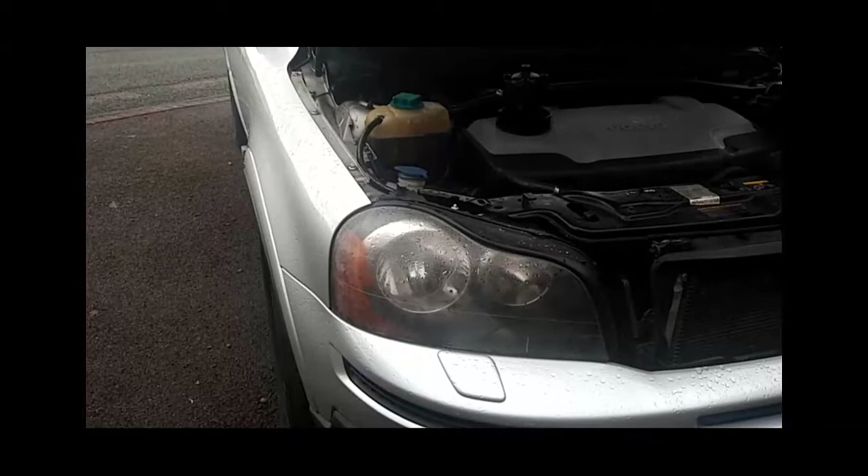Today I'm going to show you how to repair the power steering pump in a 2007 Volvo XC90. This is a UK model, so it's driving on the right hand side, with a D5 2.4 diesel engine.

So basically the problem was the power steering was stiff when stationary. When the car is stopped, you start the engine and try to turn, it's very stiff, pretty stiff, you can't actually turn it. You would need full hand power.

So I took it to the garage, not the Volvo dealer, the local garage. They said I need to replace the pump. I was curious and wanted to find out what could actually go wrong with the pump. I couldn't see any oil leak or anything like that. Power steering fluid was full to the limit it was supposed to be. Had no issues, but still no power steering.

So when you're driving, when the car is moving, it's all fine. But when you're parked, when you want to reverse and all, it's absolutely a nightmare.

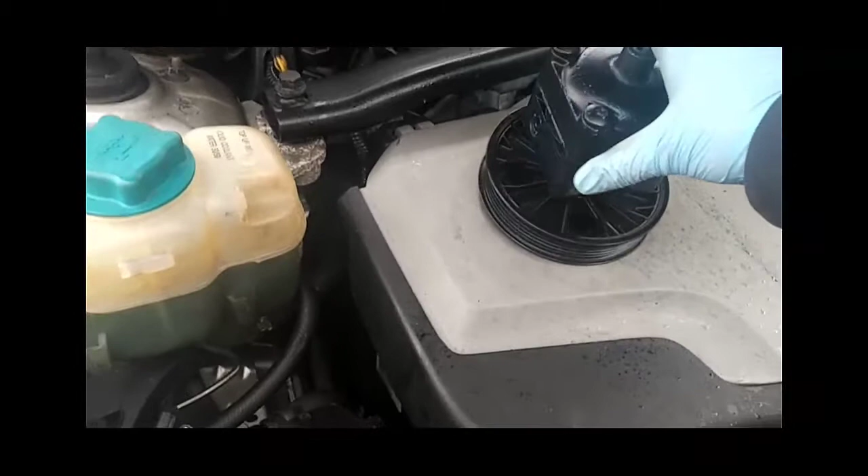So I've taken the pump out here. This is the pump, sorry I couldn't find any part number or OEM number for me to give you. I haven't made a video showing how to remove the pump, what to remove and how to put it back, because there are plenty of videos on YouTube you can find. I thought I'd save my time and your time, just showing what the exact problem was.

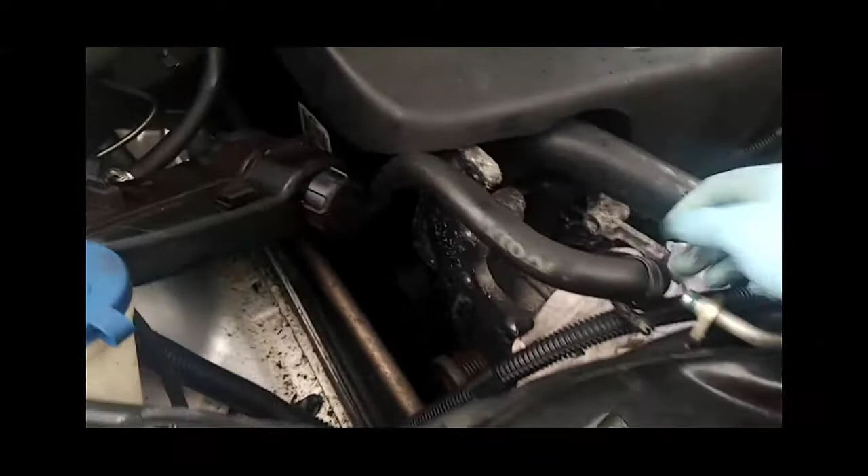So my problem is very stiff power steering when it's stationary. As you can see, I've just emptied the oil, then removed the casing, then removed the drive belt, removed the hoses, the pipe, and took this one out.

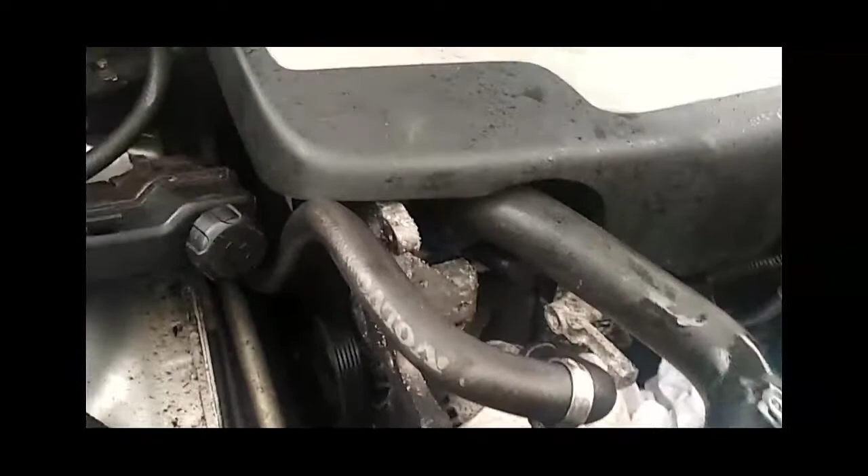From there it had bolts - 1, 2, 3, and then the one at the back here, so 4 bolts, 10mm. You have to undo those and take the thing out.

So I've taken it out, and I'm going to show you in the next video what the exact problem was, how I fixed it, and how to do that.

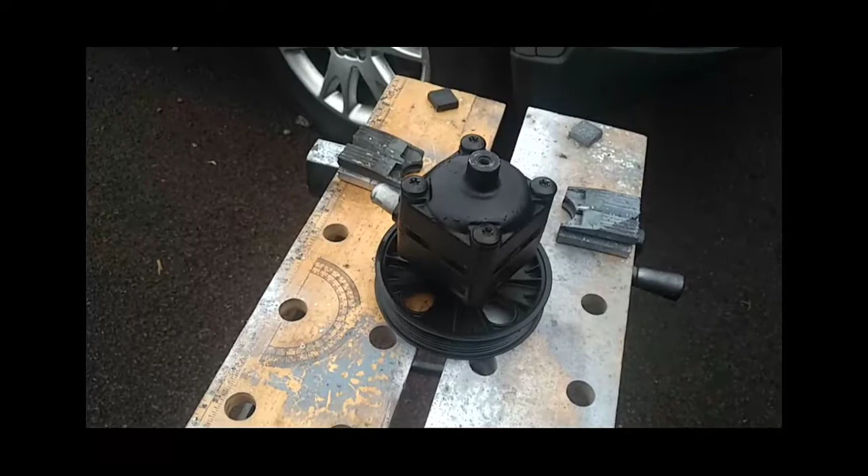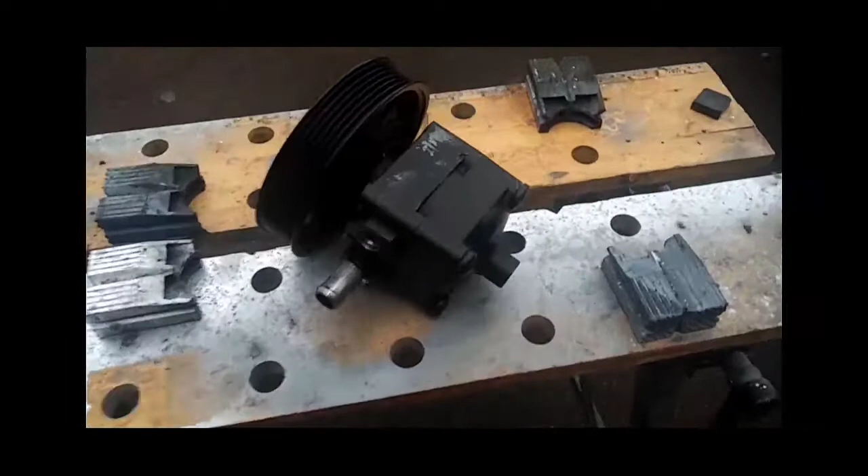Right guys, here's the pump again, the Volvo. So to confirm what I did, I checked everything in there and everything looked perfectly okay. Then I was looking for other possibilities that could have caused the pump to be an issue with the pressure.

And then I found this one - it's an Allen key, size 4. I removed it and found the washer inside. It was like solid, so stiff, like plastic. You try to squeeze it, it snapped.

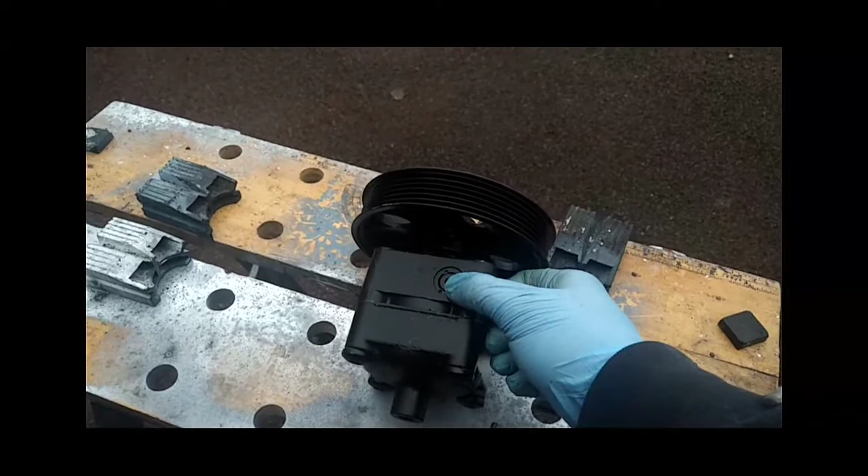So then I replaced it with a new one. Sorry, not a washer, it's an O-ring, a rubber O-ring, that's what was there. I couldn't find the O-ring with the Volvo dealer.

They didn't have it, they said they don't do any of this kind of stuff, I'd have to buy the entire pump. So I just went to Halfords, found an O-ring kit which was 8 quid, put it back in there, and now this one is ready to go into the engine.

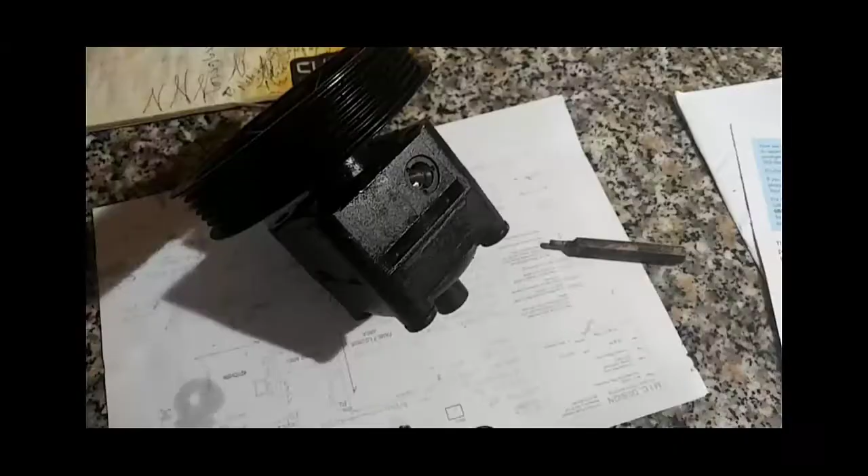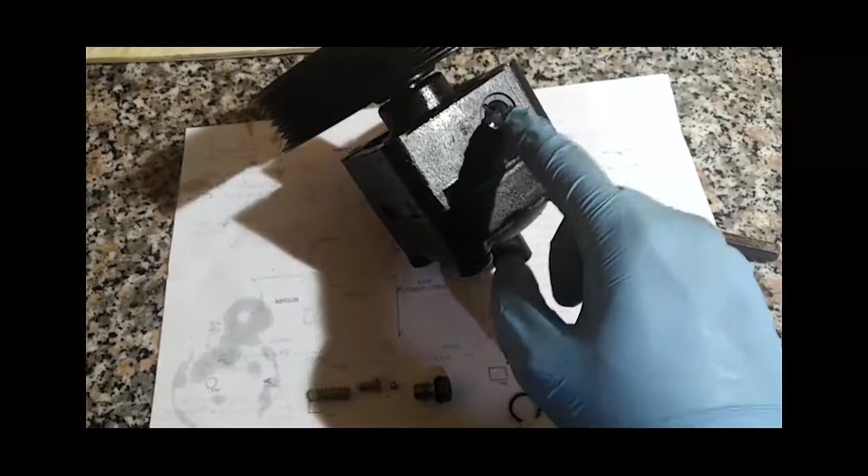Right guys, yeah, I fixed it back. Before that I have to confirm again - the internal O-ring and the external one, which goes to the external pressure control valve, that's what I'd assume the name for it is. The O-ring goes there.

I couldn't get it from the dealer, so they wanted me to get the entire pump. You could try it on Amazon, or you could try it on eBay.

eBay is the right place. It's got anything and everything.

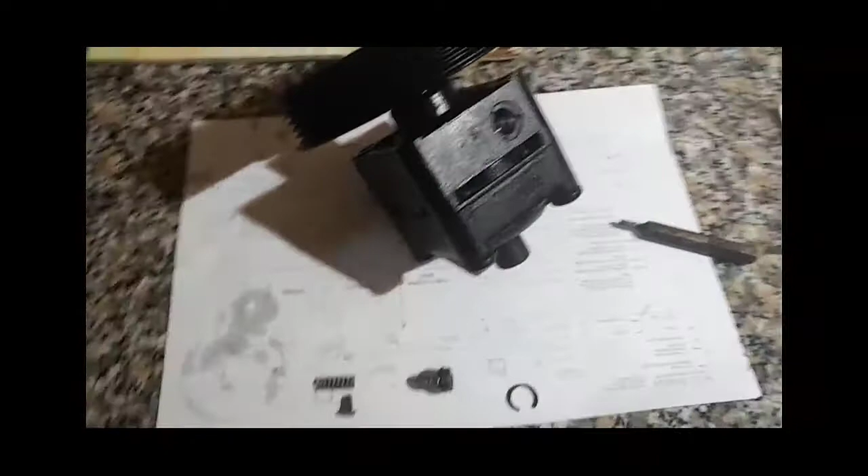I didn't try on eBay because I thought I'd give it a try just with the control valve, the valve O-ring. I didn't change the internal, the big O-ring. I would advise you to change it, because I'm not sure what's wrong with the pump, or if it's something wrong with the steering wheel rack. I don't know. So as first port of call, I thought just check the pump, check the O-rings, and then take it from there. Right, so yeah, as you can see, there's a big hole in there.

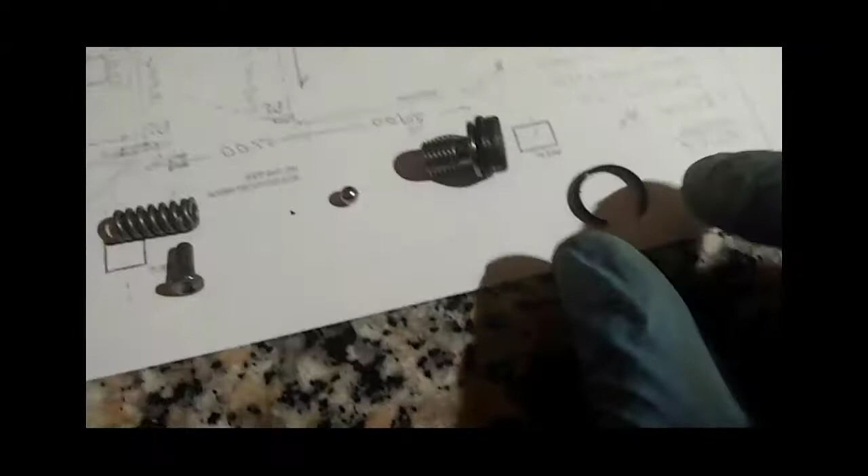So this is the one, the one with the new O-ring. This is the one I had, which is more like a plastic now.

And you will see a spring. Oops, where did it go? Oh, there you go, mate. Oops, almost missed it. There you go.

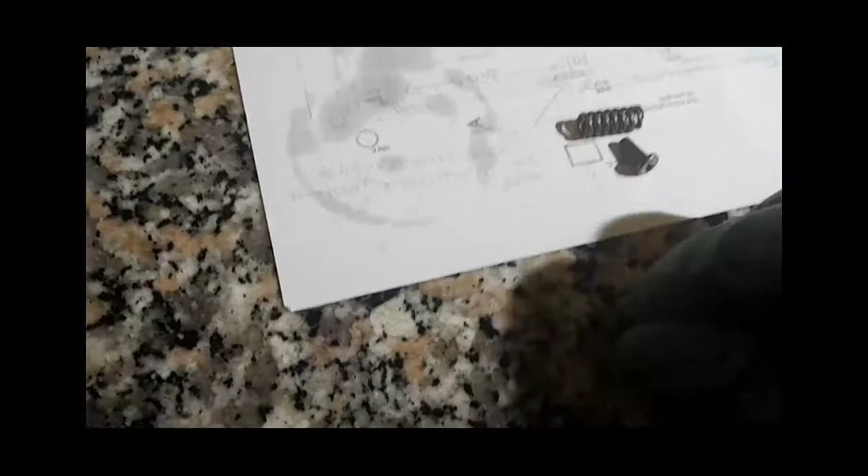Careful with it. The most important thing is that when you remove this valve, you have to use an Allen key size 4. It says on mine it's size 4 Allen key, right? I don't know if you can see.

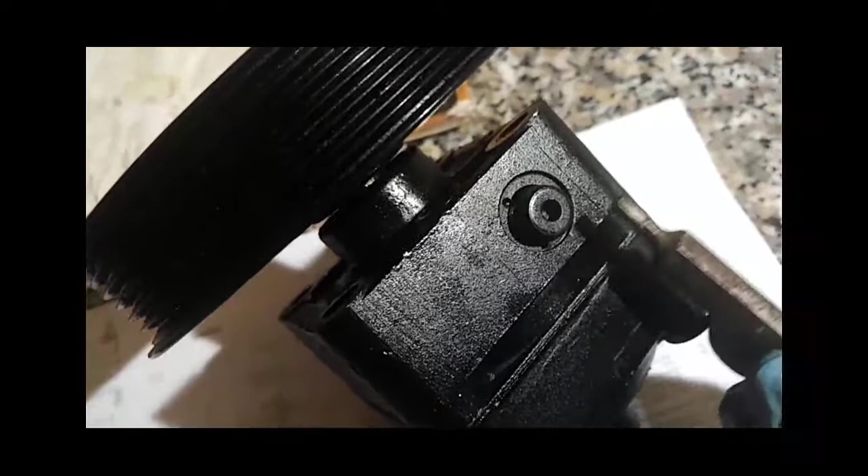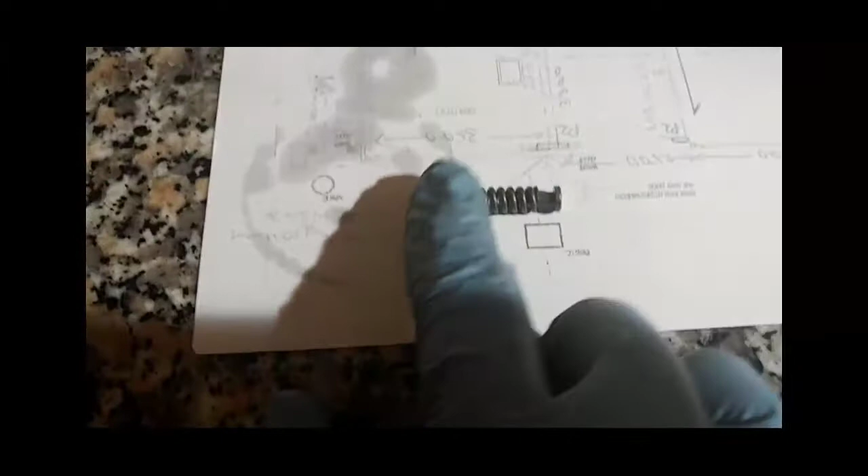That's the one, right? So yeah, these 3 parts fell off, right? So you've got a spring there, and then something's going in there, sitting on it. There you go, sitting on it. And then you've got this bearing, the ball thing, and then you've got that one going in, right?

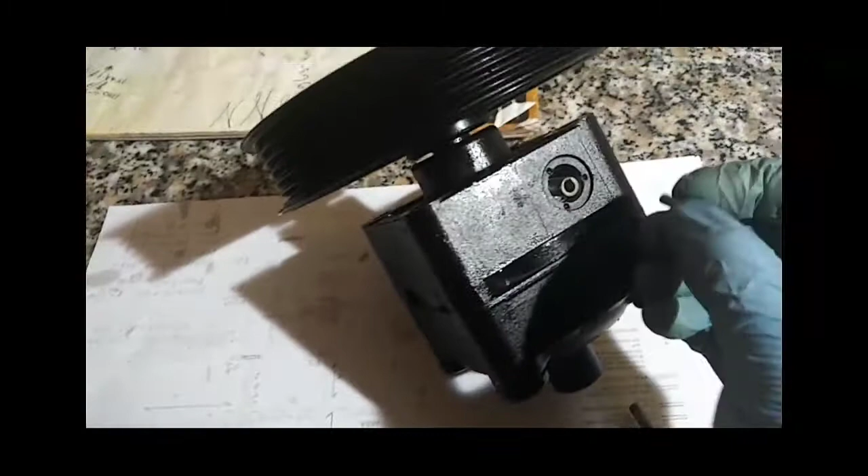So what I'm gonna do is put that one first, and then I'm gonna put, sorry I didn't take the spring, I'm gonna put that, and then the ball bearing, and then that. So I'm gonna fix that, and then I'll show you once it's done.

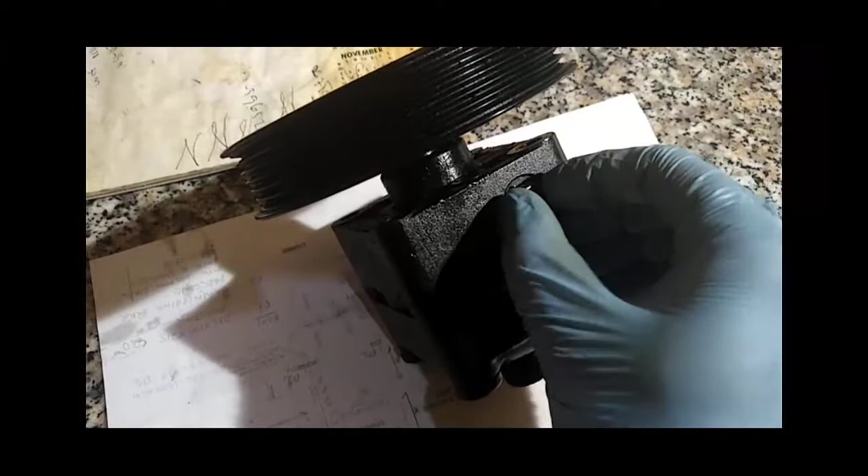Make sure you apply some oil to it. I just applied some power steering oil across the surface of the O-ring. And there you go, screwing it in. It's quite tight now.

So let's see, sorry, it's quite dark. It's the maximum lighting I could get. But it wouldn't go in. I don't know if the O-ring is quite big for it.

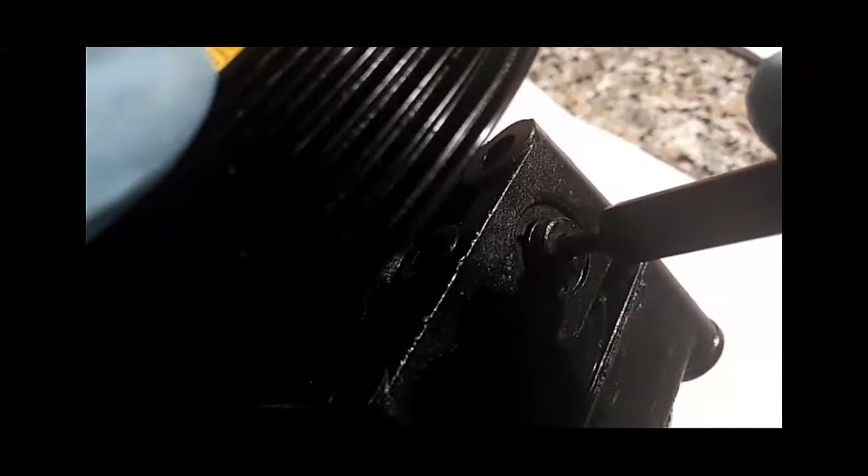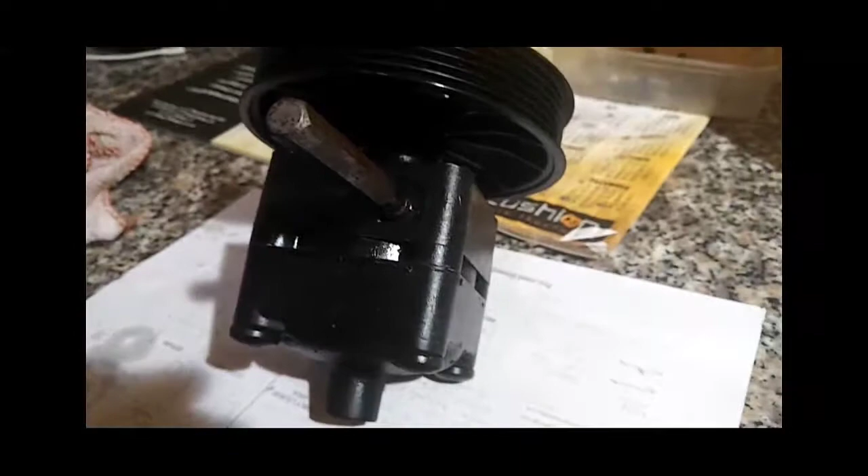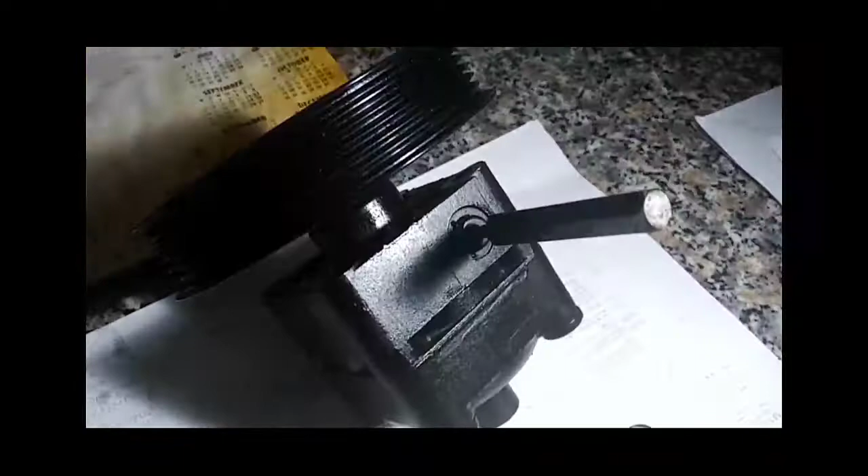Right, that's the maximum lighting I can have in here. Let me check if I can get it out. Let's see. That's too bright. Right guys, I'm just gonna see how it goes on my own, and then I'll come back with the next video.

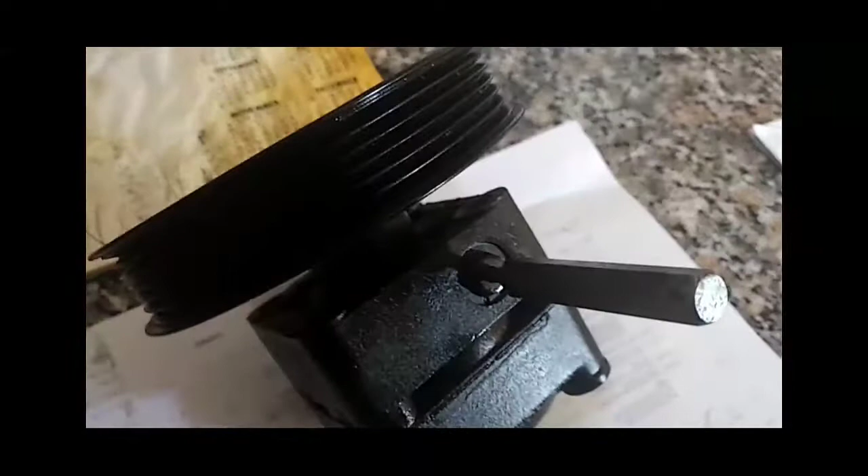Okay, it's in. So I've screwed it down to where it was before, because I had a mark in there. So it's time to go and put it back into the engine.

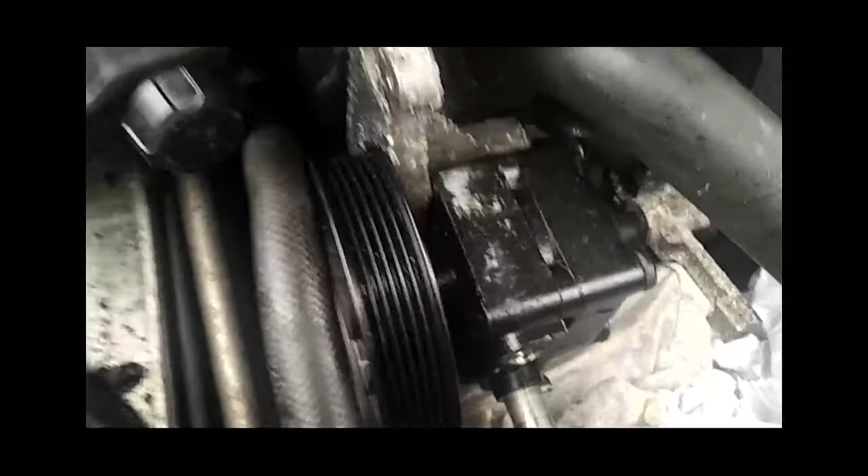Well guys, now the pump is ready to go back in. You might think, is it possible to remove that external pressure control valve without removing the pump? No, it's not at all possible, because as you can see, there's less than half an inch gap there, and there's no way you can get in there. So unfortunately the pump has to come out. That's the only solution here.

So yeah, the pump is in. Now I'm gonna put both the high pressure outlet and inlet pipes together, and then put everything back. And then I'm gonna top up the oil with a brand new one. Let me show you the one I've got here.

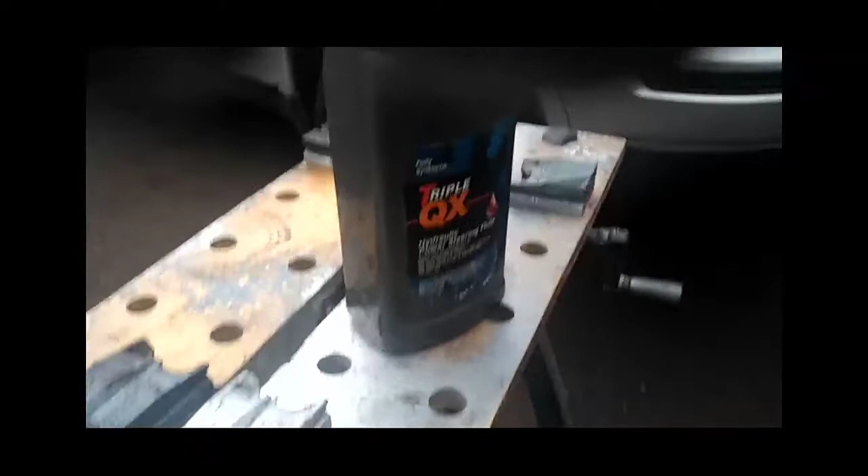So this is the oil I've got. I bought it from Euro Car Parts, it's fully synthetic triple QX.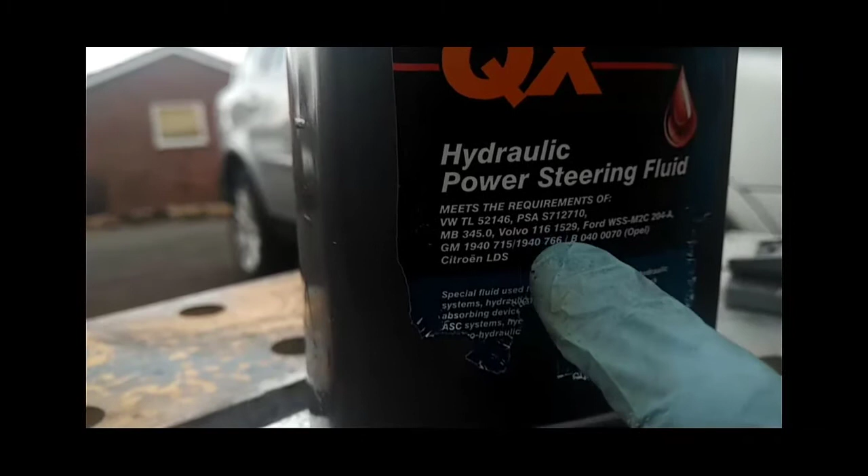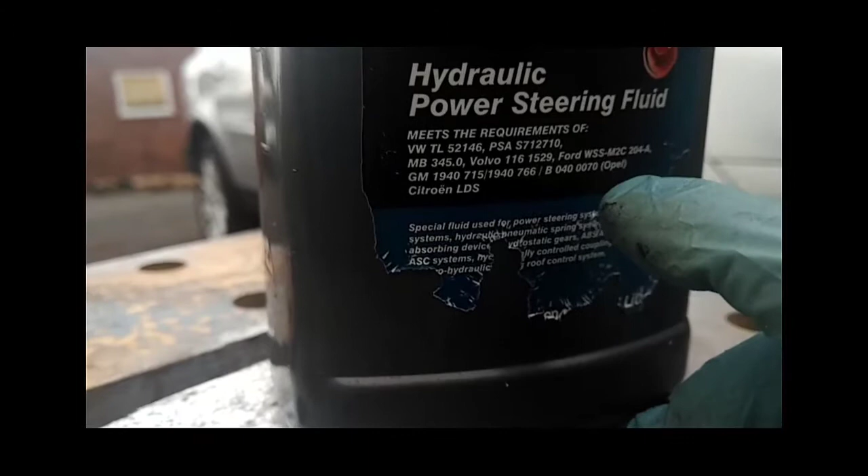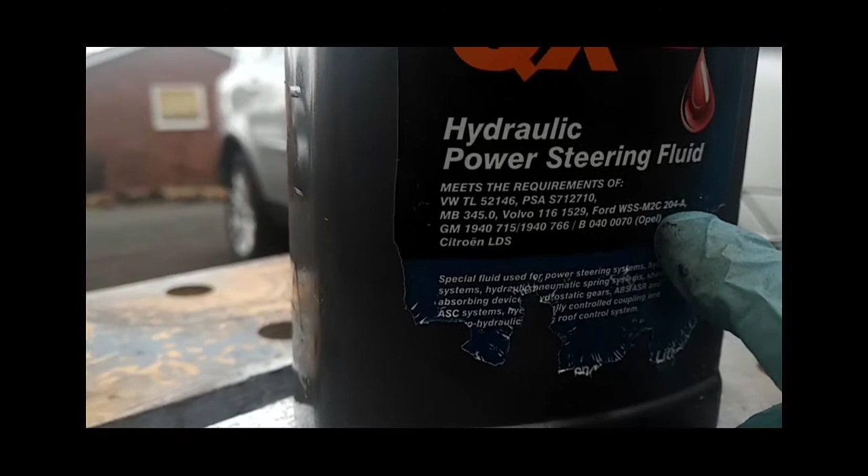What you have to look for is, now in here it shows Volvo 1161529. I couldn't find this in the manual, the car manual, on the service page. All it says is what power steering oil it should take. On the Volvo book, it gives this code, WSS M2C204A. It doesn't say Ford on the book, but in here it says Ford. It doesn't matter, I believe. Please, anybody correct me if I'm wrong.

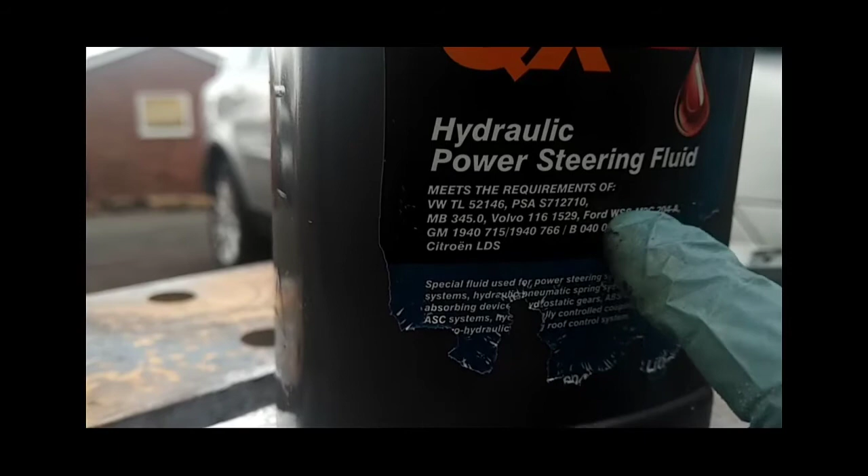This is what I went for. Okay, I found that one, bought it. It's 1 litre. I'm gonna completely change the oil in the power steering reservoir.